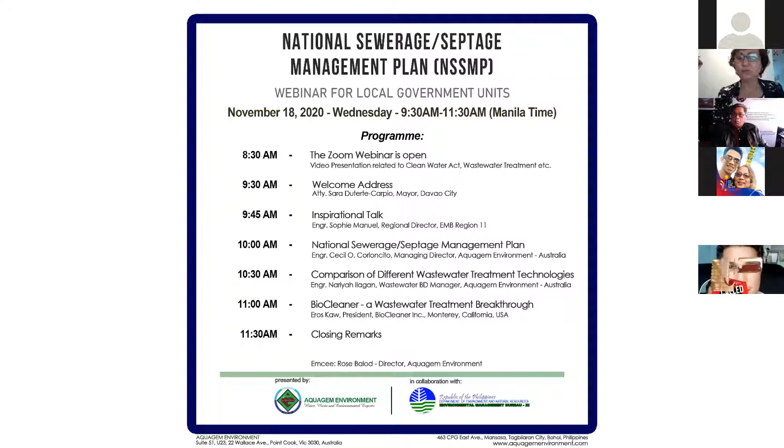All right, so good morning once again, everyone, and welcome to our National Sewerage Septage Management Plan webinar. It's 9:30 in the morning Philippine time, 12:30 p.m. in Melbourne, Australia, and 4:30 p.m. at Monterey, California. So once again, I welcome everyone, and we officially commence our webinar. My name is Rose Balod, and I am one of the directors of Aquagem Environment, and I am based in Melbourne.

So we have a wide attendance demographics. Imagine involving 3 continents, Asia, Australia, and North America. That's really a wow thing this morning. So before we proceed to our presentations, may I invite everyone to please have a moment of silence and join me in spirit in thanking God for gathering all of us today.

113 participants all up, and I'm sure there would be more joining us in a little while. So we really thank God for this opportunity today that we can gather together and make a difference to our country, the Philippines, and its people. Thank you all. We also would like to thank God for the gift of technology that made it possible for us to meet when we can't gather face to face. So we ask the Lord to bless us, to bless the next 2 hours, and may God's wisdom and guidance be with us. And may God bless us all.

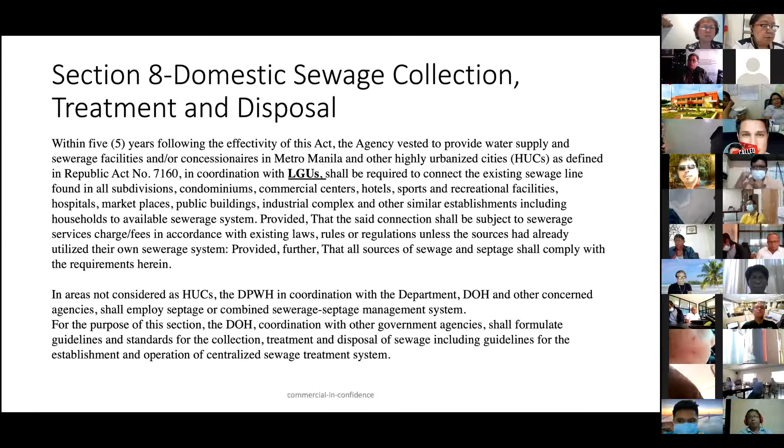So again, welcome to Aquagem Environment. Aquagem Environment is an environmental engineering and management consulting firm. We are based in Melbourne, and we have a trademark that is applicable in Australia and all over the world. We have 3 core services. We offer ISO training and auditing. Currently, the EMB Central Office has just garnered their ISO 9001:2015 certification under our tutelage. So welcome and congratulations to them.

I think nandiyan si Ma'am Tina ISO na sumasama diyan sa ating webinar. That's a very good achievement by the EMB Central Office.

Legal compliance: we help industries comply with the Clean Water Act and other applicable laws. In fact, we conduct feasibility studies on sewerage, septage, and centralized wastewater treatment plants. I'll show to you later. We design and build water and wastewater treatment facilities at marami na kaming na-install. Without much ado, I will show you what we have done as a consultant.

Aquagem Environment is the consultant of quality management system for DENR EMB Central Office and regions 2, 3, 6, and 10. We are also the consultant of environmental management system for DENR Central Office, EMB Central Office, and EMB Region 2, sa ISO 14000 naman yan. We have conducted a feasibility study for the sewerage, septage, and wastewater treatment for the protection of Lake Buhi in EMB Region 5, for the protection of Calapan River at EMB Region 4B, and for the protection of waters of Panglao Island, Bohol Province.

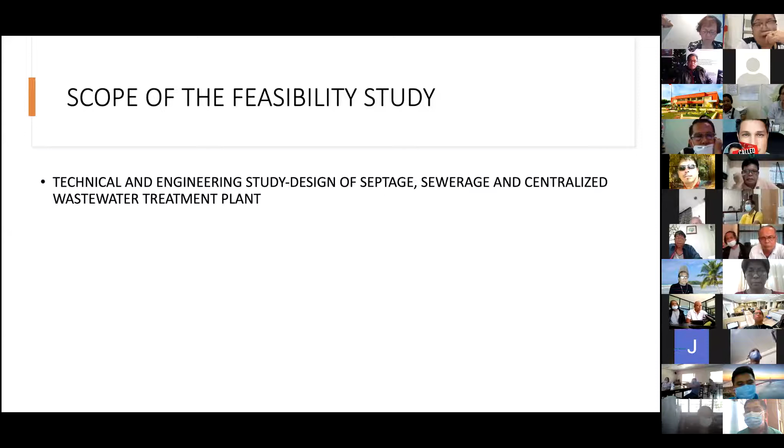Okay, so again, protection of the waters of Panglao, the pristine, my hometown. We have to protect this. I was with the mayor last year. We conducted public consultation about how to protect the waters of Panglao. And despite the pandemic, we have delivered our feasibility studies to them. So what is this feasibility study? The feasibility study has the scope of technical and engineering study. We designed the septage, sewerage, and centralized wastewater treatment plant. We conduct financial analysis of the cost of this facility.

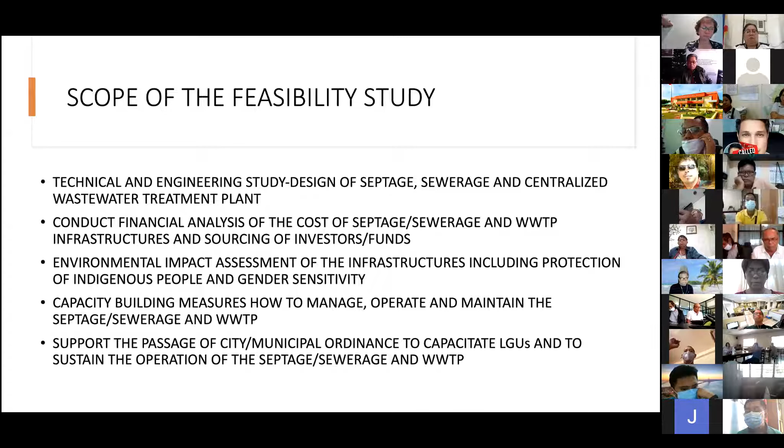We conduct environmental impact assessment, because when you start this facility, you have to apply for ECC, or environmental compliance certificate, including protection of indigenous people and gender sensitivity. We conduct capacity building measures on how to manage, operate, and maintain septage, sewerage, and wastewater treatment plants. And above all, for the LGUs, we help support the passage of city municipal ordinances to capacitate and sustain the operation of septage, sewerage, and wastewater treatment. So that is the content of our feasibility study.

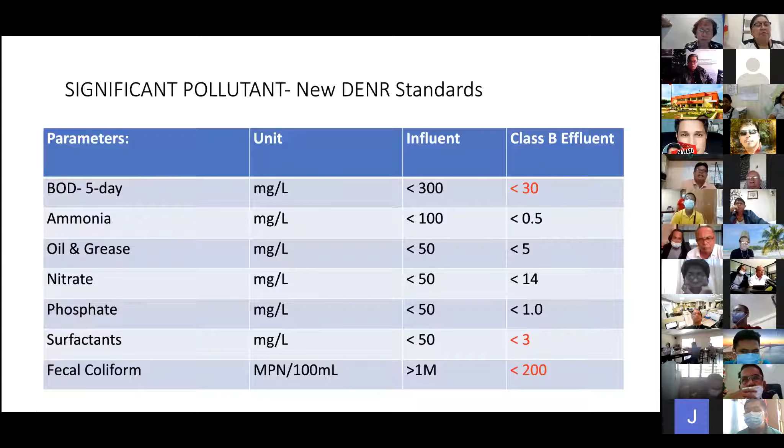So what do you mean by septage management? It's simple, septage management is to manage your wastewater. But what are our practices? Business establishments are required to have a septic tank before a building permit is issued by the local government. That's under the building code. You cannot approve a building unless they build a septic tank.

Old septic tanks, back in the day, allow percolation of water to the ground. The third chamber allows that to percolate to the ground. That makes it a problem now, especially in Boracay, because the third chamber is still considered polluted under the Clean Water Act. The new septic tank must be completely sealed. That's the new direction now. So no more percolation. LGUs have to check that all septic tanks must be completely sealed. You know that a septic tank is actually a primary wastewater treatment plant.

We think it isn't, but it is capable of removing 50% of biological pollution, known as biochemical oxygen demand, or BOD. Domestic wastewater, sewage, normally has 300 parts per million, or milligrams per liter, of BOD. It's not that large. Just imagine you flush 5 gallons in your toilet and your waste is actually quite small. That's why our pollutant, even though it's that small, is still pollutant.

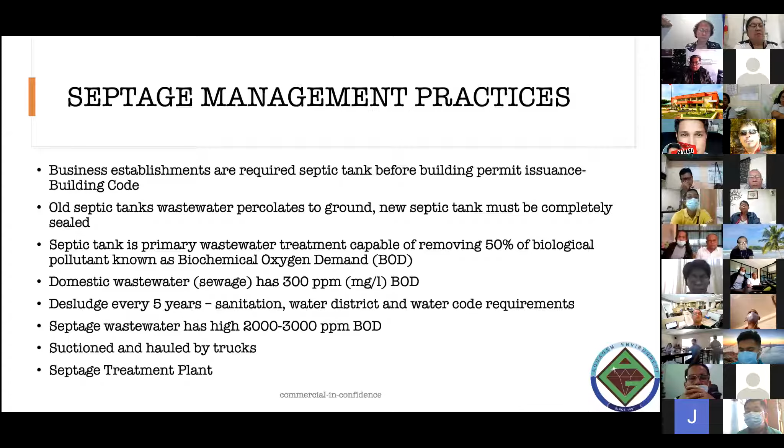Now, let me give you an example to demonstrate how it works. In Panglao, or in any tourist destination all over the Philippines, a tourist consumes 180 liters per day of water. So if a hotel has 100 persons times 180 liters per day, that is equivalent to 18,000 liters, or 18 cubic meters, per day of pollution. If you look at this situation, the septic tank normally has dimensions of 2 by 3 by 1.5, giving it 9 cubic meters. But 18 cubic meters is being produced by one hotel. So your septic tank of 9 cubic meters gets full in half a day.

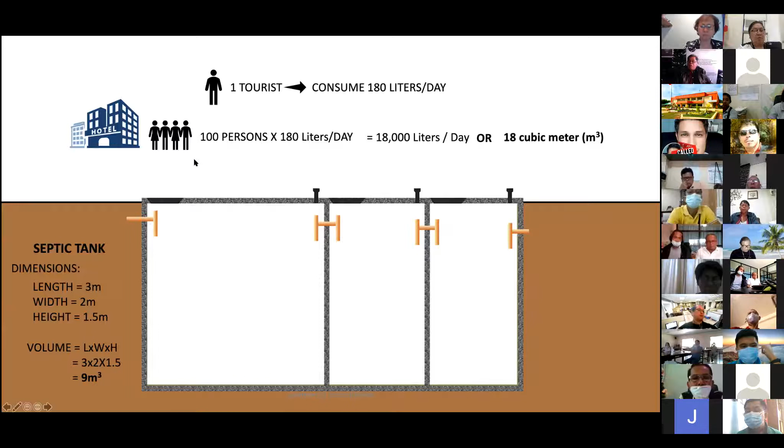So what happens is wastewater goes to the septic tank with a pollutant level of 300, it transfers to the second chamber, then to the third chamber, and goes out removing 50% of the pollutant. 50% means what? 300, 50%, that's only 150. The DENR standard is what? 30.

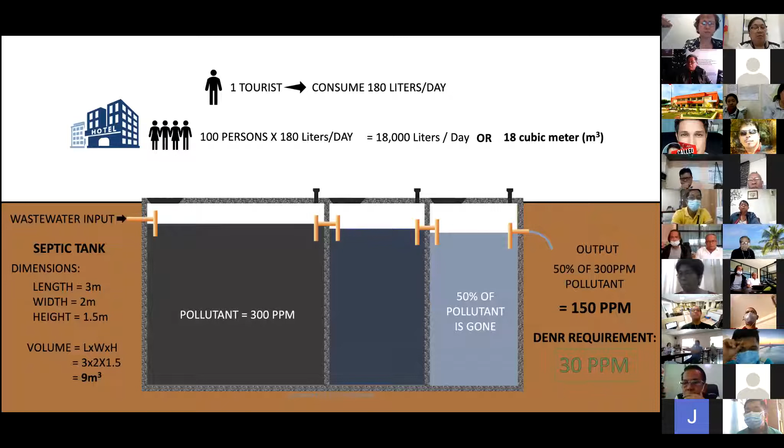So your septic tank cannot pass. I hope you really understand this one slide, that a septic tank can only treat but could not pass the Clean Water Act. So it fails, building code fails, because of septic tank only.

Clean Water Act requires that wastewater discharge should be equal to beneficial use of or water body classification. What do you mean by this? Water beneficial use means, what is the use of that water?

So if the water that comes out of the septic tank is 150, you need a wastewater treatment plant to make it 30 to 50 ppm BOD or the pollutive substances. So you need a wastewater treatment plant to be allowed to discharge Class C or Class B water to marine or inland water. So this is the situation.

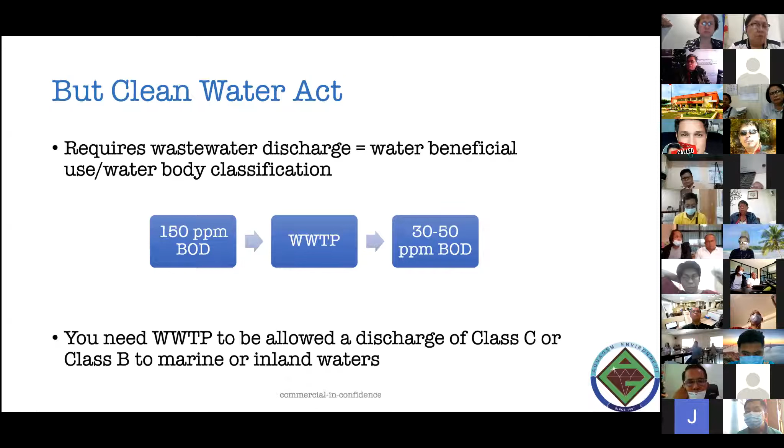So septic tank, no matter what you do, many of you multiply the septic tanks, but septic tanks are only primary treatment. Even 100 septic tanks, it is only primary treatment. It cannot remove further the pollutive substances.

What is sewerage and septage management combined together? Sewerage is reticulation or conveyance network. That means, for an existing highly urbanized municipality, it's difficult to have a stand-alone conventional sewerage system. Stand-alone means only sewerage goes in.

Combined storm and sewerage, because at present we already have storm drainage where rainwater goes in. There is a design to combine that for the sewerage system.

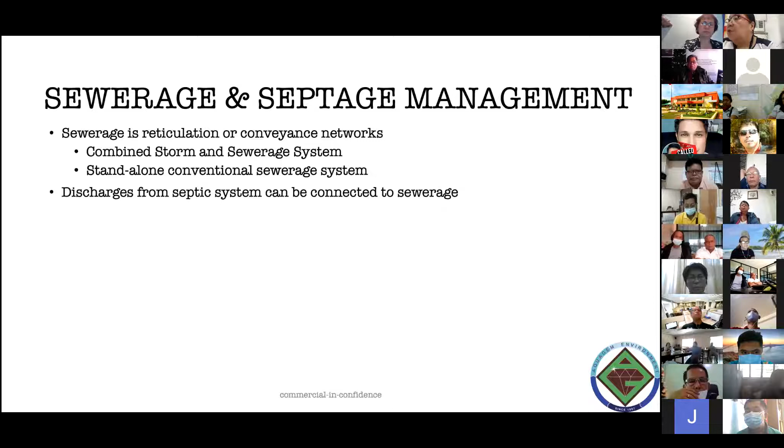Discharge from septic tank can be connected to a sewerage. Sewerage flows to a centralized wastewater treatment plant to meet the parameters. Industrial wastewater must be pre-treated to meet the centralized wastewater treatment criteria to connect to a sewerage network. So what we're saying is that sewerage is a reticulation, a piping system from your houses to connect our septic tanks.

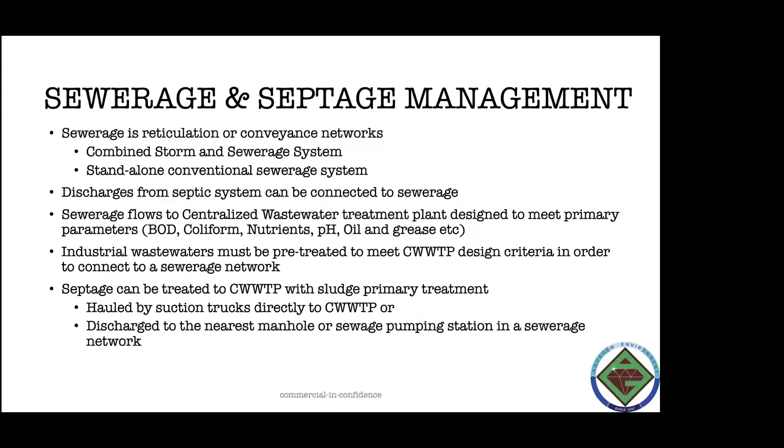The septage can be hauled to the centralized wastewater treatment plant, hauled by suction trucks. If the sewerage network hasn't reached it yet, it can be siphoned, then the septage will be sent to the nearest manhole of the sewerage or sent to the centralized wastewater treatment plant. That is a proper sewerage system.

Now, there are facts about on-site wastewater treatment versus centralized wastewater treatment plant. What do you mean by on-site? On-site means each one has its own treatment plant. Centralized means there is only one treatment plant, but it's connected through a sewerage system. So these are the facts.

Sewerage and septage with centralized wastewater is more effective to protect waterways than on-site wastewater treatment plant. As during my interview with Mang Tane, it's clear that it's very hard for DENR EMB to monitor. Even here in Region 11, if they chase after everyone, McDonald's, Jollibee, sari-sari stores, and so on, they would exhaust Ma'am Sophie's budget.

It is cheaper to connect. Take note of this, if you just connect, it is cheaper than building your own treatment plant. So connecting is cheaper. However, sewerage network and centralized wastewater treatment is not a clear requirement of the Clean Water Act. There's really nothing in the Clean Water Act that says you must have a centralized wastewater treatment plant. What it says is that everyone should connect to a sewerage network. It was assuming like Manila, Makati, that if there is sewerage, you have to connect.

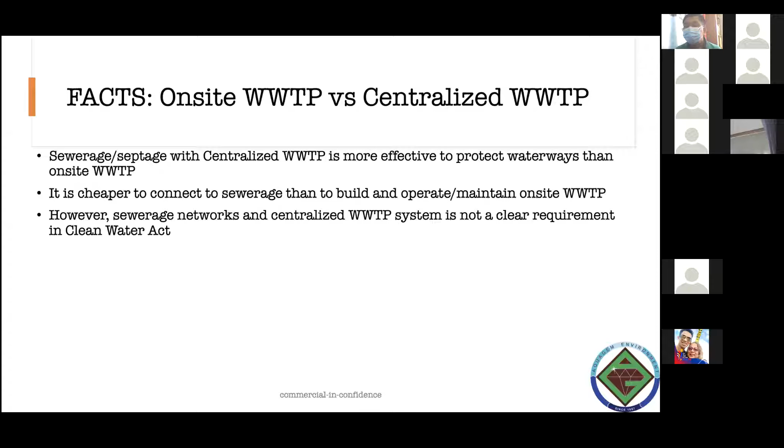How about cities like Davao, Cebu, and other big cities, including our own very own Tagbilaran City, that don't have a sewerage network? The law did not specify that you must have a centralized wastewater treatment. That's one of the loopholes of the law. The sewerage network and centralized wastewater is not a clear requirement, so it's not really much of a requirement.

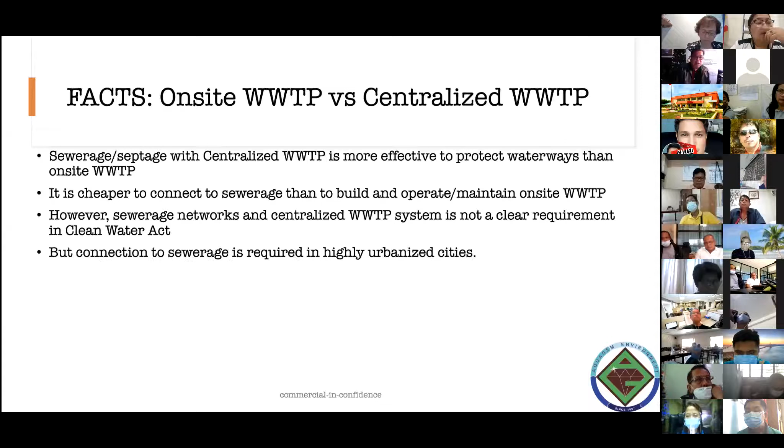But connection to sewerage is required in highly urbanized cities like Manila. Now there is another problem. There is no volumetric threshold in the Clean Water Act in regulating discharges.

In Australia, only those who consume 5,000 liters per day of water are pursued by the local EPA or the DENR here. So here, even the smallest amount of water would be chased after. That's not going to be a realistic thing. We have to focus on the risk to the waterways.

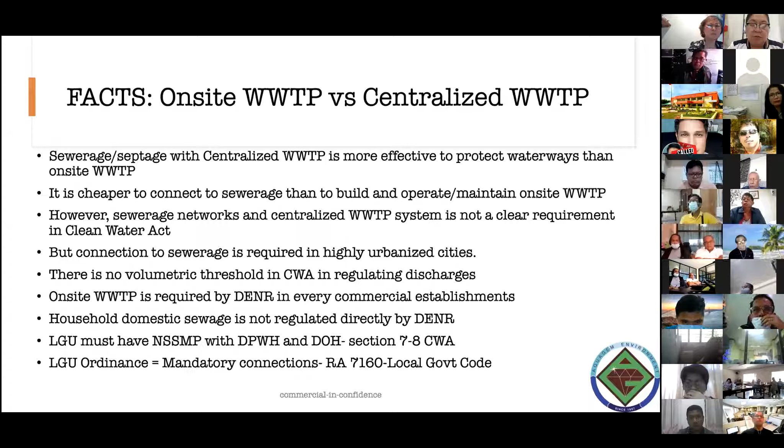But are LGUs going to wait kung wala pang nangyayari? You are powerful LGUs. You have Republic Act 7160 under the local government code. Now, if the Clean Water Act says there is no requirement for a centralized wastewater treatment plant or connection to a sewerage network, under Republic Act 7160, it's not said that Republic Act 9275 is more powerful than Republic Act 7160. You are equally powerful by passing an ordinance to have a mandatory connection to a sewerage network through the Sangguniang Panlungsod ordinance para magiging applicable. And we are here to support you how you are going to do that.

That's why we need to understand this, because the law specifies that the DPWH will support you. Now, ang DPWH naman ay hindi susuporta kung wala kang feasibility study. Ano ba plano mo? What is your plan, LGU? But it is also the mandate of the DPWH to come up with a National Sewerage and Septage Management Program. So either way, kung hindi sila gagalaw, yung sarili mong LGU ang magsasuffer sa pollution. Eh hindi naman taga-DPWH ang nakatira, kayong taga-LGU ang nakatira, the one living near in your locality. So you have to do this plan properly.

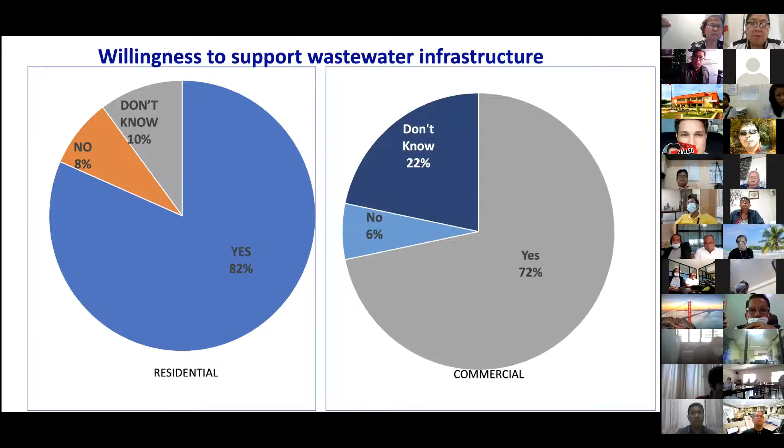According to our survey, despite the cost, the residential sector has 82% willingness to support wastewater treatment infrastructure, and even the commercial establishments are willing to pay. However, commercial establishments don't know if they are going to pay. Some of them say yes, but we need to have more education about centralized sewerage and septage management.

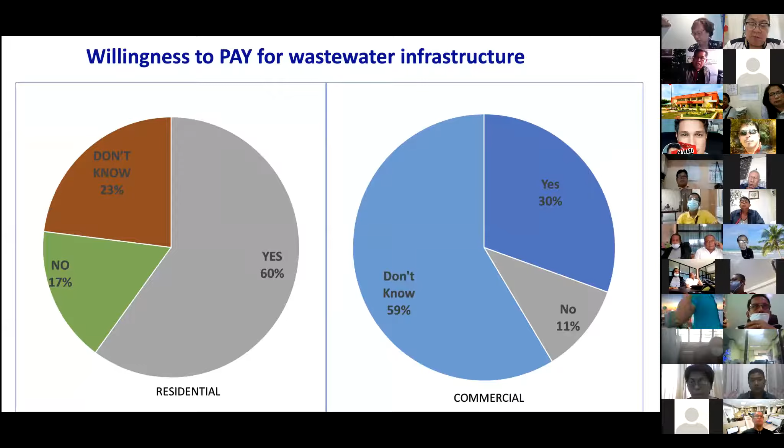Now, I'll give you an example of LGUs buying or a marketplace buying their own treatment system or connecting to a centralized wastewater treatment plant. This is a case study. If you connect to a sewer, for example a 50-room resort with 100 persons as I showed, that's 18 cubic meters.

Ang daily fee is 1,254. Ang monthly fee is 37,000. Ang yearly fee aabot ng 457,000 sa isang resort in order to connect to a sewer.

Now, if you are going to buy a wastewater treatment plant, siguro sa ganyang klase, 3 million yon, i-operate mo pa yon, 1.741 million per year. So you buy, then you operate them, kasi running a system is different from buying. Parang bumili ka ng kotse, ayaw mong paggasolinahan. So I have said that the break-even point, kung bumili ka, dito ka na lang sa connection, at meron kang break-even point na 10.36. So this is an actual analysis of buying your own STP versus connecting to a sewerage network. Now, how are you going to decide what technology you're going to use?

You need to come up with a multi-criteria analysis. But since you are not really an expert on this, that's why we come into the picture as consultant. We help you decide what needs to be done, what kind of technology needs to be implemented in order to come up with a multi-criteria analysis. What are those? Do you have enough area to make the treatment system and the sewerage? Is the technology complying with the DENR standard?

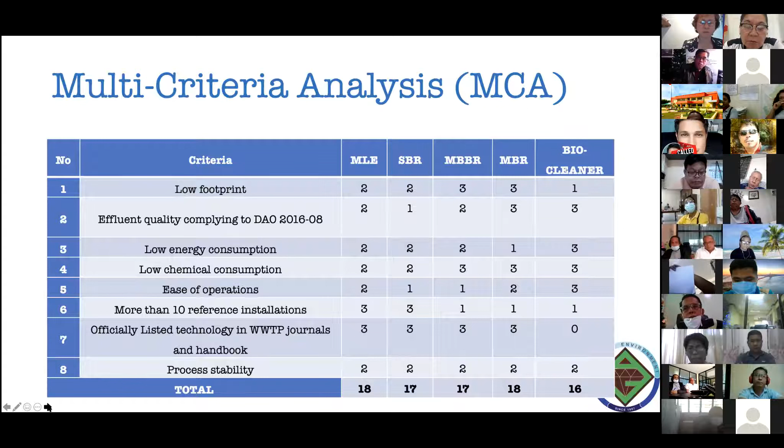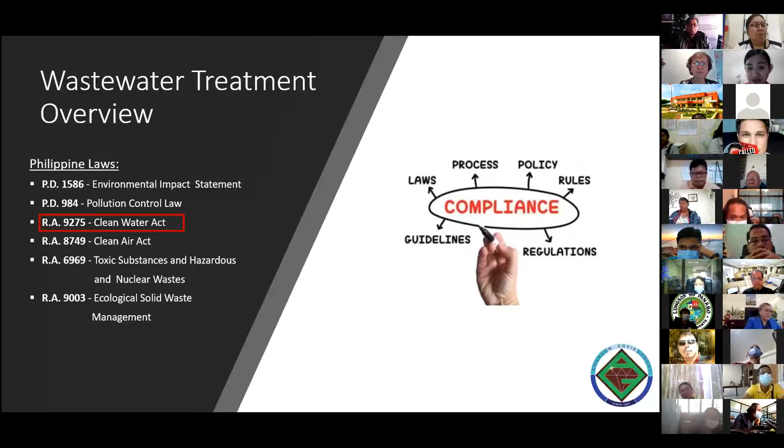So in the Philippines, we have a number of environmental regulatory compliance requirements mandated by various laws. One of these, as was discussed by Sir Cecil, is RA 9275 or the Clean Water Act. It stipulates not only the importance of wastewater treatment, but also the standards that should be met to ensure the protection of the water bodies that receive the treated wastewater, since, as we all know, water continuously moves within the earth and the atmosphere through the water cycle.

So aside from being required by the law, I believe that it is our social and environmental responsibility to ensure that wastewater is properly treated. We all owe it to one another, as no man can survive without water. If we don't do our part, it will result in contamination of our water bodies, which could be toxic to aquatic life and human beings due to the degradation of its quality. Consequently, it could cause the spread of diseases, loss of biodiversity, and even climate change.

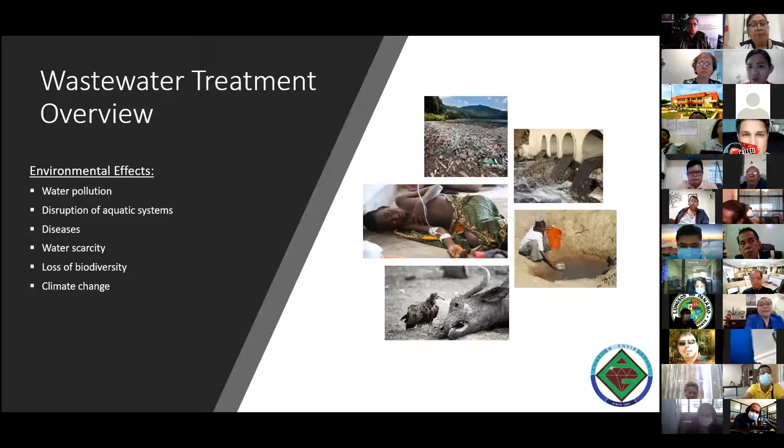So what happens when we treat wastewater? How do we do it, you might ask? Generally, there are 4 levels of treatment involved in a wastewater treatment plant. These are the preliminary treatment, the primary treatment, secondary treatment, and tertiary treatment. We will be discussing each in the following slides.

So initially, wastewater, if domestic, will come from toilets, kitchens, and sinks. Coming from sewer lines, it will flow into the facility by initially passing through a screening process. So solid wastes such as rags and debris are removed through screens of various sizes, such as coarse screens which cater to solids greater than 6 millimeters in size, and fine screens for solids less than 6 millimeters in size. Even the smaller particles like sand and gravel are extracted in the grit removal.

So this is essential to ensure that proper treatment is done and also to protect the mechanical assets of the plant. So these are mainly the pumps, because that would be a problem if may ma-stuck po dun sa mga pumps natin. So afterwards, it will flow through an equalization tank. This could be an aerated tank. As you can see in the picture, there are bubbles because of the supplied oxygen for mixing.

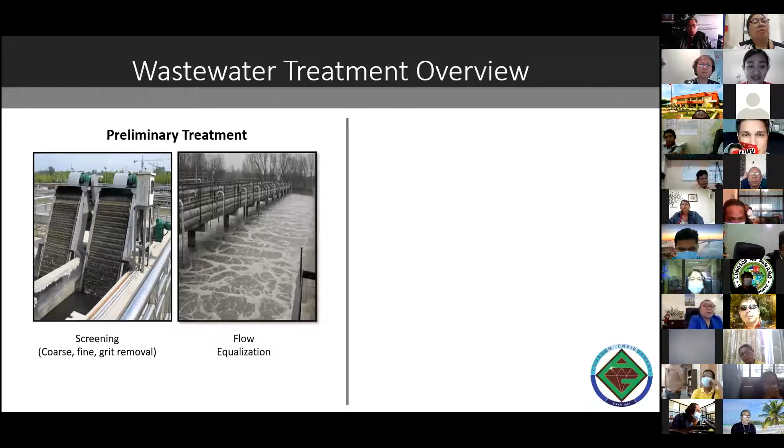Okay, since the incoming wastewater may have different parameter levels, such as its pH, BOD, or the oxygen needed to naturally degrade pollutants, and COD, or the oxygen needed to chemically oxidize pollutants, among others, like what you have seen in Sir Cecil's presentation, mixing is needed to homogenize its quality to meet the facility's design specifications. So kailangan pong haluin ng maayos para pare-pareho po, pantay-pantay yung quality ng wastewater natin.

So from the preliminary treatment, it will pass through a primary settling tank or sedimentation tank. This process slows down the flow of the wastewater to allow the organic solids or the raw sludge to settle by gravity. This process produces two products, the sludge and the wastewater. Usually, the tank is designed like a funnel, or mukha po siyang embudo, so that the settled sludge can be easily extracted from the bottom part of the tank and transferred into a sludge holding tank, while the wastewater flows through the weirs into the aeration tank.

So once the solids are removed, the wastewater will then flow through the secondary treatment. This is the heart of the process, as this is where the organic pollutants are eliminated and the wastewater is treated. There are a great number of secondary treatment types, but for this presentation, we will be focusing on the biological aerobic treatment. Biological aerobic treatment entails the use of microorganisms which thrive in an oxygenated environment to remove the organic pollutants.

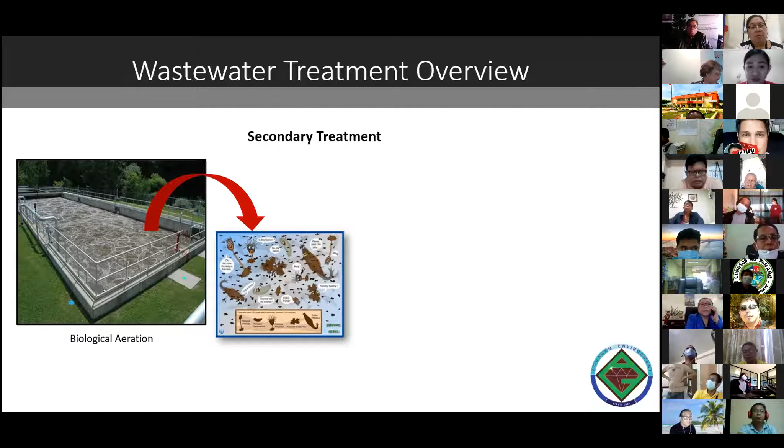So from the aeration tank, the treated wastewater will then flow through a secondary clarifier. It has the same purpose as the primary clarifier, but it separates activated sludge, which contains the inorganics, organics, and microorganisms, from the treated wastewater instead. So the activated sludge is allowed to settle again prior to transfer to the sludge holding tank, while the treated wastewater flows to the next process.

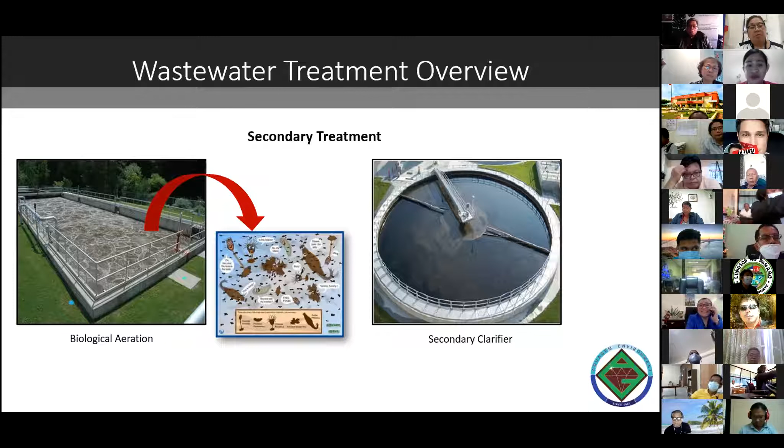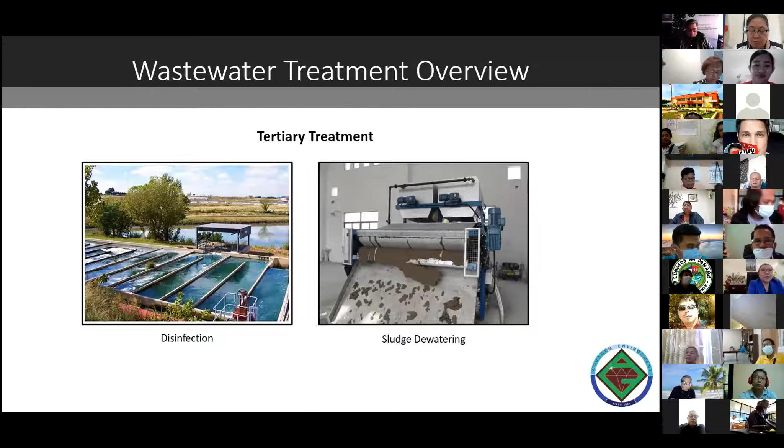On the other hand, the sludge coming from the primary and secondary clarifiers, which have accumulated in the sludge holding tank, are thickened. So that is the process of decreasing the water content prior to dewatering. This can be achieved through the use of various equipment such as a belt press, a screw press, or a drying bed, among others. The dewatering is needed to yield biosolids, which are then hauled out and used as organic fertilizer.

So now that you have seen the overview, let us proceed to discussing the most common and widely used wastewater treatment technologies. You will see that these technologies follow the same 4 treatment levels I have presented, but the majority of their differences lie in the configuration of their biological aeration tank. So we will be going through 4 different technologies, starting with the conventional activated sludge.

So for the conventional activated sludge, or CAS, same as what we have discussed earlier, you can see that the raw wastewater goes through screening and primary clarification prior to the biological aeration. Specifically, the microorganisms in the biological aeration tank are just floating about without any constraint. So sama-sama lang po sila dun sa loob ng tangke. And they're freely interacting with oxygen and the pollutants in the wastewater. The treated wastewater from the aeration tank then flows to the secondary clarifier before it is disinfected with chlorine and discharged as effluent or treated wastewater into a receiving body of water.

Meanwhile, the sludge from the primary and secondary clarifiers, which we call WAS, or waste activated sludge, is removed. You will also see a return line, or the RAS, coming from the secondary clarifier to the biological aeration tank, since there is a need to resupply the microorganisms to ensure that they are enough for the treatment. These microorganisms po kasi, they have a lifespan. That's why it is necessary for us to replenish their population.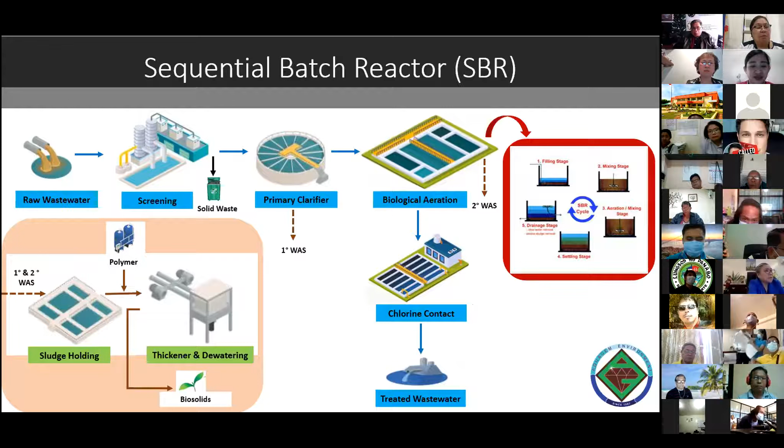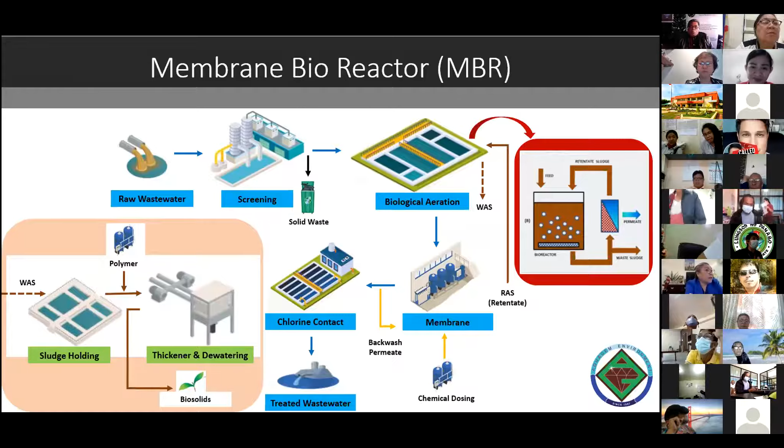Okay, so since you now more or less understand the different wastewater treatment technologies, let me now show you their relevance to the feasibility study that Aquagem Environment has conducted. So last August 2020, Aquagem conducted a study on the feasibility of constructing a centralized domestic and commercial wastewater treatment plant for Panglao Island in Bohol.

So considering that it is surrounded by water and that tourism is a major economic driver of the island, ensuring proper wastewater treatment and protection of its waters becomes all the more necessary and important. Of course, we don't want another Boracay incident, with improper untreated wastewater discharged directly into the ocean, possible spread of diseases, and possible closing of the island to happen.

The plant is projected to have a maximum capacity of 5 MLD or million liters per day, and Aquagem did the design for its phase 1 volume of 1 MLD, considering the 4 technologies that we have discussed. So apart from those, another technology called the biocleaner was also considered, since we are always on the lookout for new emerging and innovative technologies currently available in the market.

So what made us decide to even consider biocleaner among all the other emerging technologies nowadays? Well, it has a simple and straightforward process. Same as with the others, raw wastewater enters the plant through a screening process, but one difference from the other technologies is that afterwards, it will flow through an anaerobic digester.

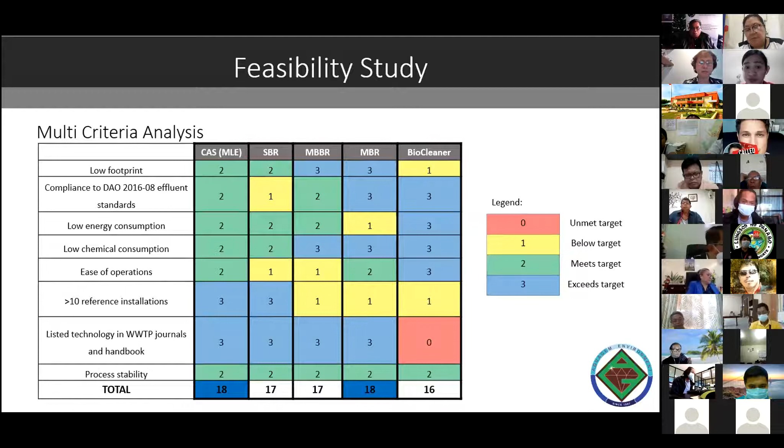So what does that mean? Although the MBR and CAS technologies have scored high on the MCA and have notable advantages in area and savings and CapEx requirements respectively, the results of the financial analysis showed that the BioCleaner technology has the shortest ROI. Moreover, the Class A effluent quality that the MBR yields is too much for the Class B requirement of Panglao surrounding waters. The overtreatment just translates to additional costs.

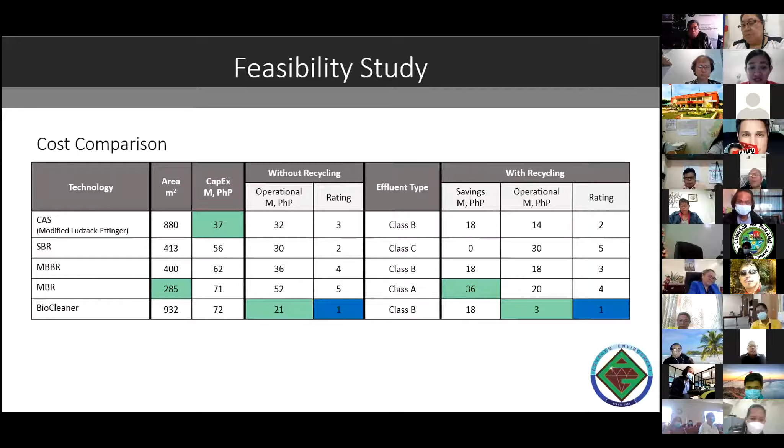Moreover, despite the high area and capital expenditure requirements of the BioCleaner technology, the savings from its annual operation cost compensate for the initial investment. So although it scored low on the MCA because of its absence in technical references, we cannot close our doors on utilizing emerging technologies, especially with the advent of technological advancements in our modern world today.

So in conclusion, Aquagem Environment's feasibility study showed that the BioCleaner technology is the most suitable technology for the Panglao wastewater treatment plant, since it is a modern, innovative, cost-efficient, environment-friendly, and sustainable treatment solution which would not only benefit its residents, but also the environment that we all share. So this is just a view of something that we can do for you.

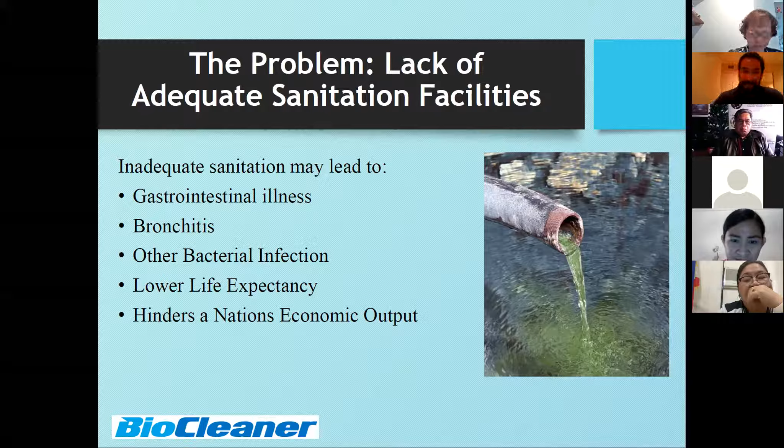The problem is lack of adequate sanitation facilities. Inadequate sanitation leads to all types of problems: gastrointestinal illness, bronchitis, other bacterial infections. It can also hinder the economic output of a country. There was a study, I think in WEF magazine - I'm sure you're familiar - that a country's GDP reduces by 3 to 4% each year with inadequate sanitation facilities. So the more sanitation, the more environmentally proactive a nation becomes, which helps increase economic prosperity in terms of developing into a developed nation.

Lack of concern for the environment is another issue. Wastewater treatment is key for preventing contamination of waterways, both drinking resources and open water resources. Today's world needs a modern, innovative solution for today's problems. We need a sustainable, efficient, but cost-effective solution, and make it environmentally friendly at the same time, as carbon footprint matters in a lot of today's environmentally challenged world. We believe that our solution is with our product.

The elegant solution - the late Steve Jobs once mentioned that when you start to try to solve a problem, the first solutions that come up are very complex, and for most people, we just quit and stop there. But if you keep going and live with the problem, as you peel more layers of the onion, you sometimes arrive at a very simple and elegant solution. Like the previous presenter mentioned, our product is a very simple and elegant solution for upgrading, changing the way we look at wastewater treatment. We believe this is a game-changing technology.

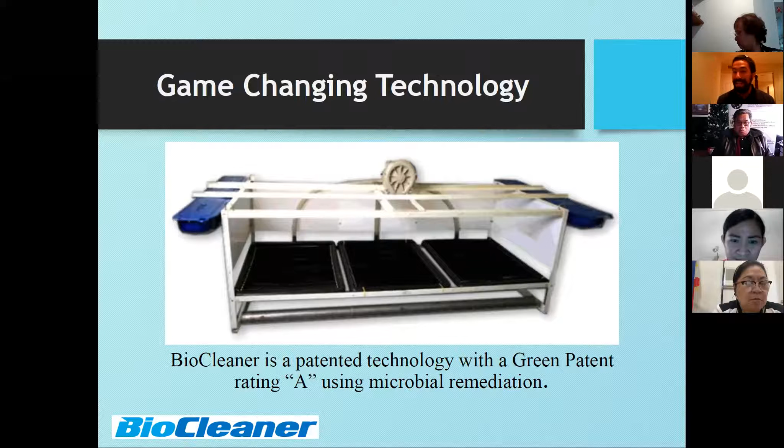This is our primary bioreactor. It's a patented technology, Green Patent A, using microbial remediation.

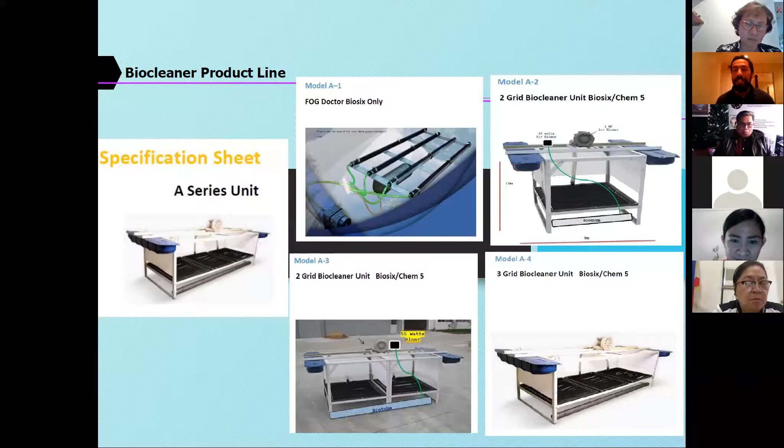This is our BioCleaner product line. We manufacture different types of bioreactors. Each type of bioreactor is a pre-engineered unit with a capacity. Although it has a capacity to treat a certain amount of waste stream coming from whichever wastewater industry we're dealing with, there's no limitation, meaning since it's a modularized system, all you do is keep incrementing the number of units you would require for any type of project or wastewater facility we're dealing with.

These bioreactors use interchangeable media - primarily geobacteria. We source the bacteria from soil and rock, and we discovered that some of the soil bacteria is actually anaerobic, coming from deep underground where there's no presence of air. We discovered that some of these microbes are actually aerobic, and I'll explain later why that is. We have two primary consortia of microbes, which we call Biosix and Chem 5.

Biosix is primarily a group of bacteria consortia. We deal with treating primarily organic constituents, so these are dealing with BOD, TSS, FOG, and nutrients, and all other biological constituents.

And we have Chem 5, which is mostly for high strength COD. These are industrial applications, and these consortia of microorganisms can break down phenols, hydrocarbons, polyphenol molecules that are in color. These types of industries, particularly in the textile industry, maybe pharmaceuticals, that have these chemical constituents, we can break down and integrate, and other compounds as well.

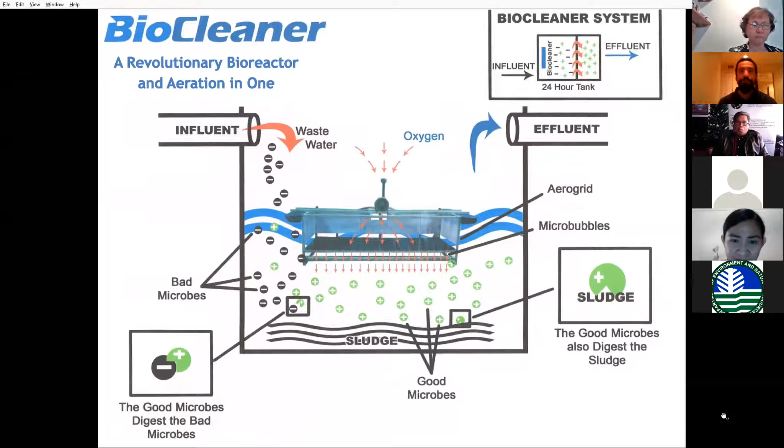Once you inject a little bit of air along with the food source, the primary immobilized microbe begins to activate and generate bacteria. So you're propagating bacteria through a ceramic pellet, which, since it's perforated, is very porous. If you were to feel the pellets, it's like a stone pellet, made out of clay and ceramic. The bacteria propagates and begins to distribute all the microbes.

Here's a simple schematic. Here's a conventional activated sludge process. You have your preliminary treatment, primary treatment, your secondary treatment, the biological treatment, and your tertiary treatment.

So if we were to design a biocleaner system compared to a conventional system, how would we configure it? Basically, we offset the clarifiers. You decommission your clarifiers, and what we do is add an anaerobic tank. Although if it's sewage it's not required, an anaerobic tank helps a lot in reducing the energy output, as well as helping break down additional sludge and solids. So the anaerobic tank is basically the workhorse of our biological treatment.

This is the reactor, the seeder, where we're generating bacteria. The aerobic tank we call a polishing tank, also generating bacteria. We take some of the outflow, about 5% of your volume or flow, and do a return feed to the anaerobic tank, introducing facultative bacteria. The microbes form a bioreactor effect so they propagate even quicker. The density of bacteria increases in the anaerobic stage due to higher amounts of food source available, since in the polishing tank they're basically starving, having very minimal food source, since you're taking the effluent water and dosing it back. That's what we take advantage of, utilizing the bacteria to best suit how we design and configure the biological treatment.

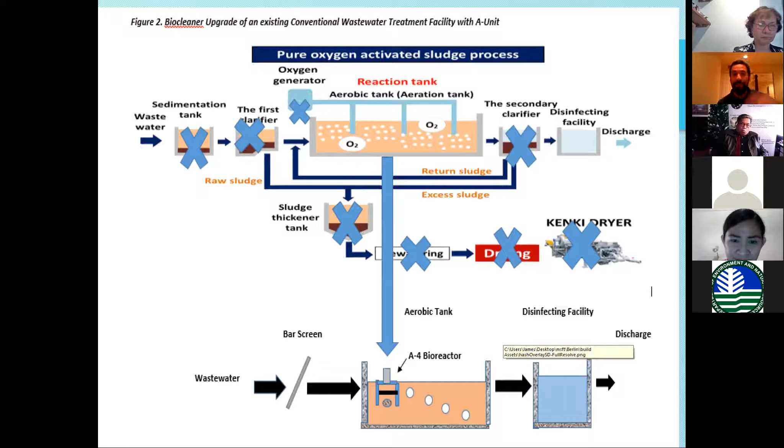Since, as the previous speakers mentioned, BioCleaner technology is not in any academic literature or wastewater journals, sludge handling is very important - how to utilize, how do we decommission sludge handling altogether. The science and biochemistry behind it, as well as demonstration through projects and applications, which we have.

Here's another scenario, another schematic, for nutrient recovery in the Philippines. The phosphorus and ammonia standards are, I believe, less than 1 ppm, ammonia is 0.5. So we also have additional equipment that we manufacture for breaking down ammonia, oxidizing ammonia, mobilizing chemosynthetic bacteria that can degrade ammonia to help meet the discharge standards in the Philippines. As well as for phosphorus, we manufacture a physical chemical filter, we call it a phosphilter. It's basically iron media that reacts with phosphate.

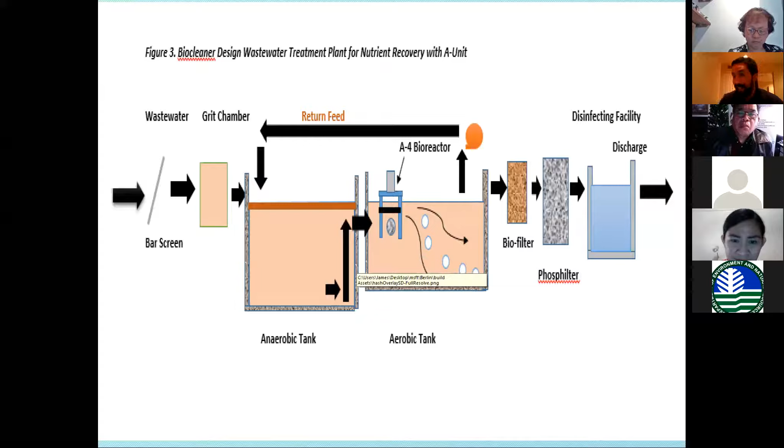Next slide. Here's another equipment we manufacture, for retrofitting septic tanks. We call it a septic ductor. When you lower this unit into a septic tank, you basically get rid of the septage. There is no odor, and you can remove up to 90% of your nitrogen, 80% of your phosphorus, depending on how we configure it. We actually do have a brochure for septic tank retrofits - we call it a micro STP, depending on the equipment we would implement into the septic tank.

Next slide. PPP - this is more of a public-private partnership. What BioCleaner can also do, instead of implementing a technology or selling a piece of equipment, is also invest in projects that provide communities with access to sustainable clean water and sustainable sanitation facilities, upgraded through affordable environmental products and services using energy efficient technology.

Next slide. So BioCleaner can arrange and participate in PPPs, P3s, to drive successful implementation of wastewater treatment facilities. BioCleaner can do a joint partnership, or look for investors to participate in offering a service to, say, a city or municipality, operating and taking managerial responsibility of a wastewater facility for a given number of years - 10, 20, 30 years. This will be a cost on a per cubic meter basis. BioCleaner and a partner will take full responsibility and implement all the required infrastructure and equipment to retrofit, expand, or build a new wastewater facility.

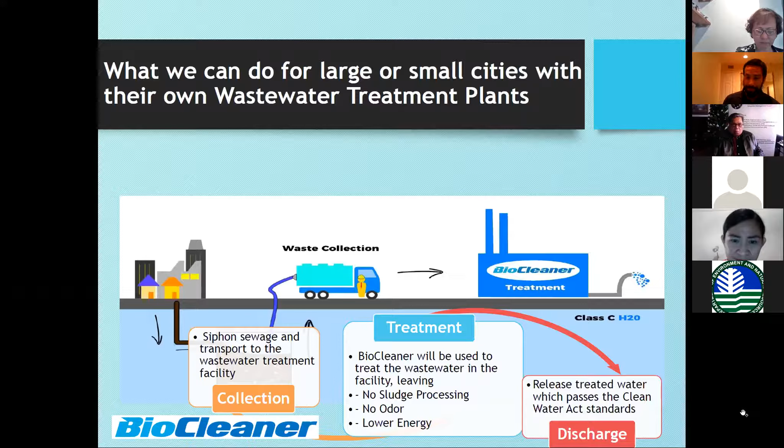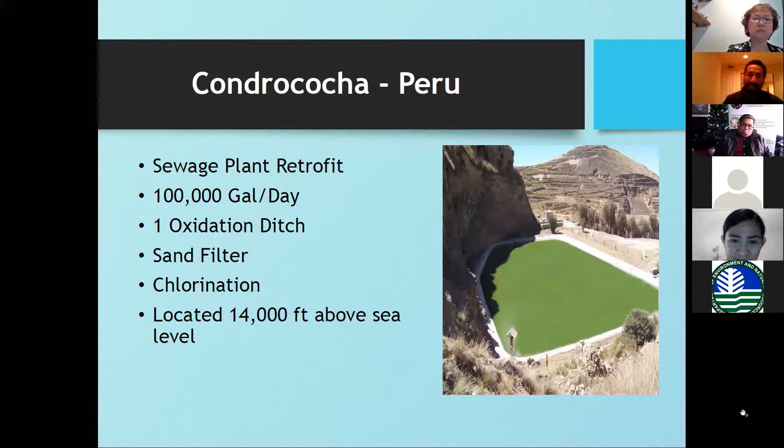So we had some obstacles we faced, mostly with the high altitude. So instead of 2 horsepower blowers, we implemented 3 horsepower blowers due to the air density, as well as the low depth of the ditches, 1.5 meters, which is not ideal for the BioCleaner system, but we added more units to compensate, as well as not having an anaerobic treatment. That's another reason why we incremented the amount of BioCleaner units. Next slide.

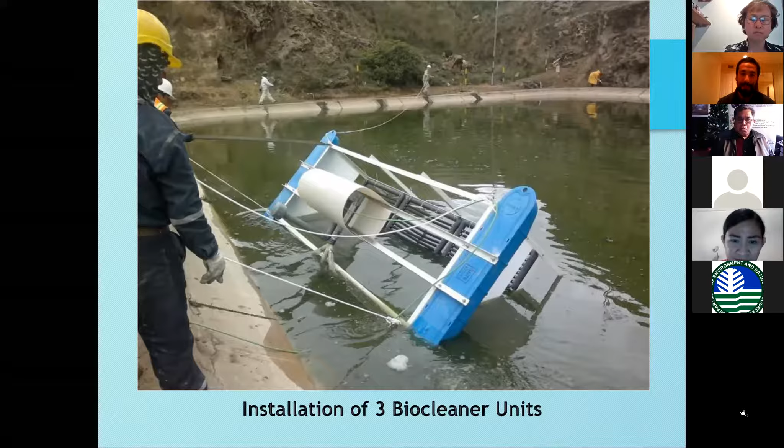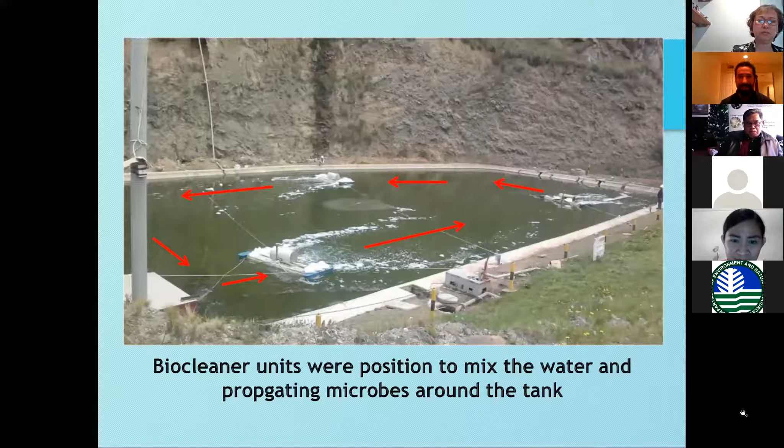So initially the water is very murky, full of algae, with a foul odor. So these are the installations. We have 3 full BioCleaner units. Next slide. Units in operation. They changed the position of the units to have mixing. Next slide. So units were positioned to mix the water and propagate microbes around the tank in a circular way. Next slide.

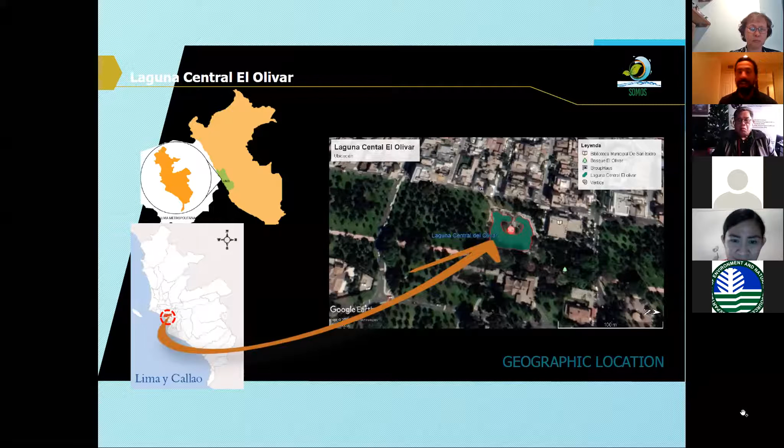Next is a retrofit of a decorative pond in a park in Lima, Peru. Next slide. So this is a decorative pond, I think a 100,000 gallon decorative pond, in the heart of Lima, basically in a park. The goal here was just to restore the pond, eliminate odor, and improve the water quality. So basically, they get the water source from the river, and every 4 months the water just becomes green and the odor starts accumulating. Next slide. The geographic location of the project. Next slide.

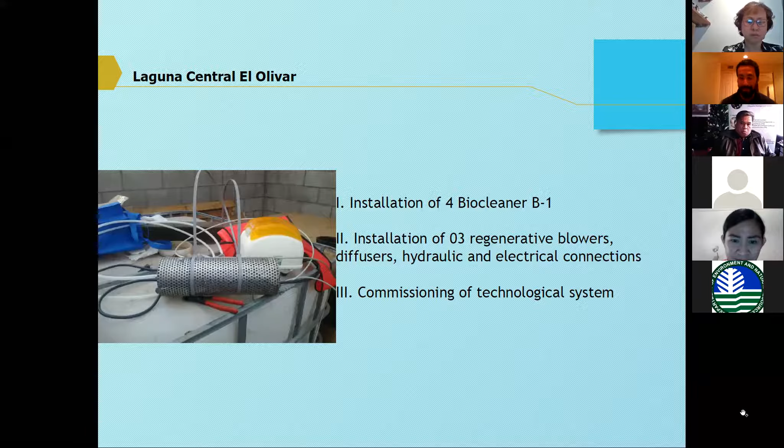So these are installations of ours. We use the smallest bioreactors, which we call a sewer jockey, or B1. Basically this is about a 30 centimeter bioreactor system, and it weighs about 2 kilograms. We use these bioreactors alone with direct external aeration from disk diffusers. Since we couldn't lower a full delivery system due to the depth of the water, we just lowered direct aeration with the biotubes. Next slide. So we chose different locations of the pond to lower the tubes. Next slide. Next slide.

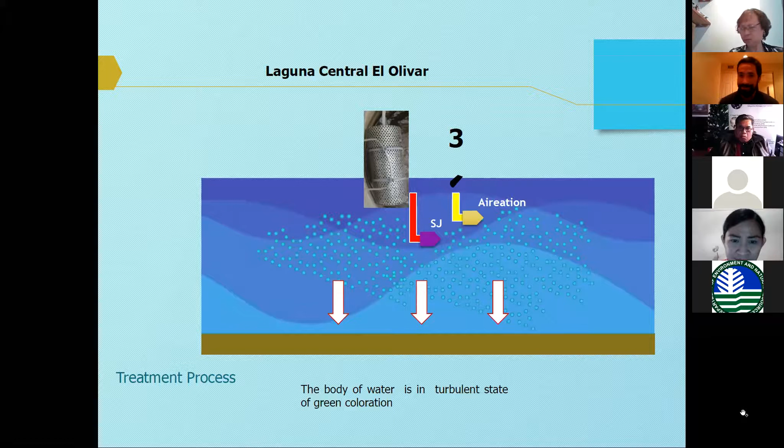So basically, over time, the quality of water improved to eliminate the odor as well as the water quality. Next slide. Next slide. Next slide.

So the future of wastewater treatment. It's the 21st century, and sanitation deserves a 21st century solution. So with BioCleaner, whether we incorporate the unit or we manage the plant, we could treat the water down to BOD less than non-detect, COD less than 5, with little to no manpower, and having all the benefits of eliminating pathogens, estrogen, antibiotics, minimal manpower.

We can even incorporate solar energy, using solar units to power the bioreactor instead of having an electricity source, as well as making BioCleaner environmentally friendly, convenient, and portable. Our formula for success is no odor, no sludge handling, the convenience of the system, as well as minimal labor.

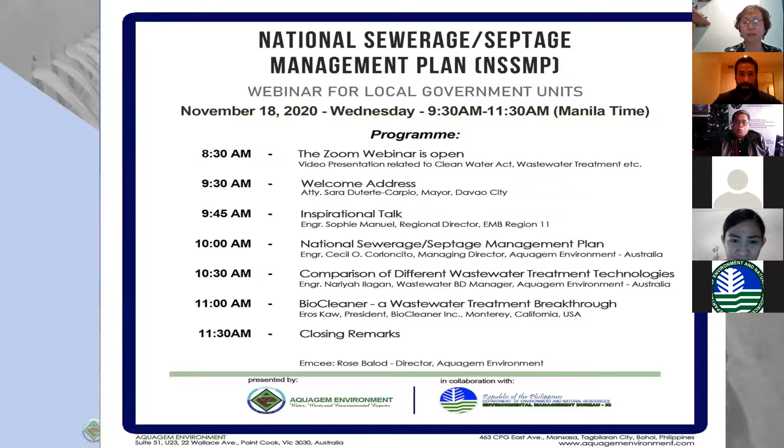All right. Maraming salamat. At last, we have finished our discussion. And where do we go from here? You will notice that the remaining two presentations are quite too technical for LGUs. But what we're trying to present is that we are offering a solution that's real and the technology is acceptable.

I am quite aware that in the Philippines, there are so many wastewater treatment companies that are offering LGUs left and right, ito yung kailangan, ito yung kailangan. So we have presented to you based on science and based on technology. And the last presentation was really a breakthrough because even myself, during our feasibility study with Panglao, I thought, no, that's too good to be true.

That's not true. But because of COVID, when I was locked down in Melbourne, I was able to connect to the inventor of the BioCleaner technology. Ganito lang yon. We are trying to promote that one. I challenged Tony and the company BioCleaner, but it turned out that they have already had installations for the last 10 years. So we are now the representative of BioCleaner here in Australia. Because our clients are mostly in the Philippines, we shared that technology for two main reasons.